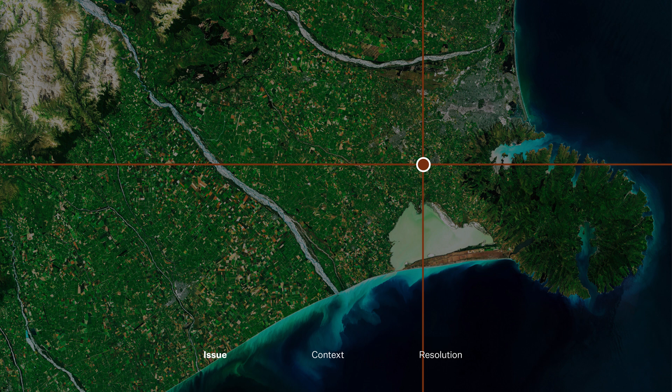We were interested in how this local project could unlock insights that might influence nationally or globally. The Canterbury Plains produce over half of New Zealand's grain and crop, and there are challenges with this level of productivity. Our intensive farming practices have turned Lake Te Waihora into one of the most polluted lakes in the country. And there is political context too.

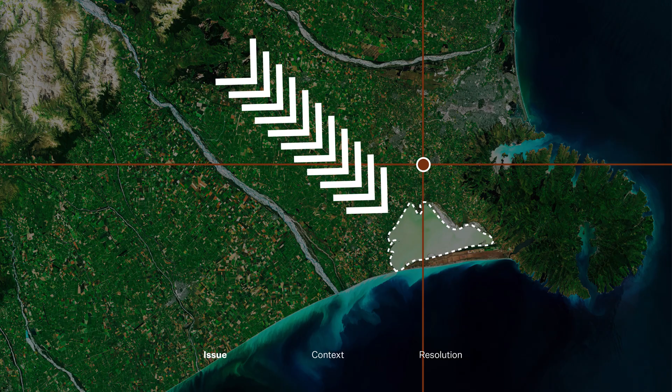Lincoln University responded to the students' climate protests by committing to decarbonise their campus and move away from coal. We have farmers who are exposed to methane taxes, and a lot of the science occurring in this facility is to help them with that.

This project site played an important role at the interface between Lincoln University and the external agri-sector, and we conceived of the project as a continuum from education to research to commercial science, extending the student learning experience into real-world scientific application and vice versa.

So how do you break down the barriers and accelerate research and innovation? Global food production problems will not be solved by traditional thinking. It is people that need to be at the heart of the solution, and Waimarie's goal was to create an environment to overcome these challenges through inter-organisational collaboration and a new approach to education.

Our project briefing reached well beyond the site and included intensive workshops with students, lead scientists, farmers, local mana whenua, and multiple land-based research institutes.

Te Taumutu Rūnanga narratives gave us a uniquely local approach to sustainable design strategies for the project. Lake Te Waihora was once an important food source for the Rūnanga, and the project siting is a direct expression of the project's commitment to sustainability.

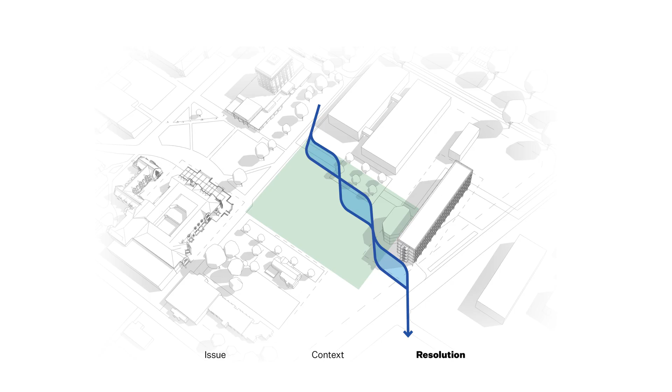Overland flow paths determined the location of attenuation basins to treat and filter stormwater for the campus. Landscape spaces continue the campus character. Labs and offices interact with the neighbouring research partners, while the teaching building defines the heart of the Lincoln University campus.

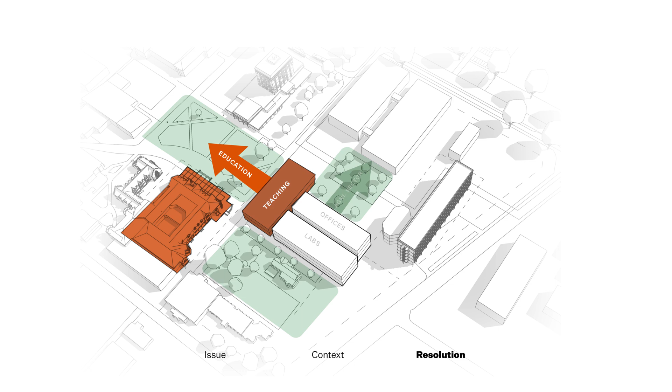Adjacent our project is the Category 1 listed Ivey Hall Library, a Jacobean-era building whose scale, vertical rhythm and curved gables gave inspiration to a robust two-storey brick building that houses teaching and learning spaces. The red brick and limestone facade are a contemporary take on its Jacobean neighbour.

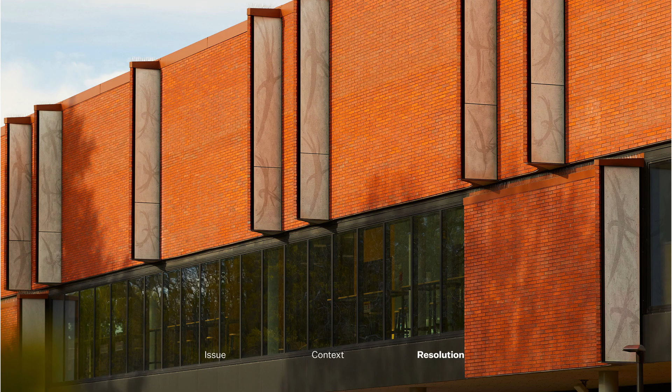This is a paekaka, a symbol of pre-colonial agriculture and innovation. It's been found scribed into Canterbury limestone bluffs and seen carrying people and kumara on its back. Overlaying European and Māori agricultural histories, our red brick facade is peeled back to reveal a limestone interior with etchings of paekaka, delivered through the co-design process with Ngāi Tahu artist Piri Kāhui.

Adjacent, a highly technical three-storey shed, with cost and material efficiency in mind.

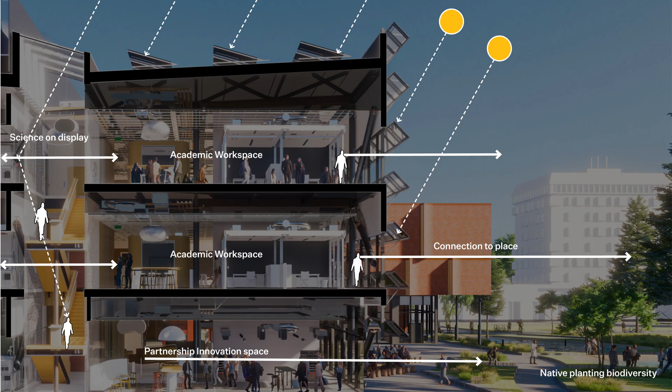Without the budget for solar control, an extensive co-design process together with Meridian and the facade engineers determined the perfect balance between solar shading, seismic slip detailing, outlook and energy generation. The resulting workspaces are calm, with high levels of natural daylight and beautiful views through the panels and out to the agricultural landscape beyond.

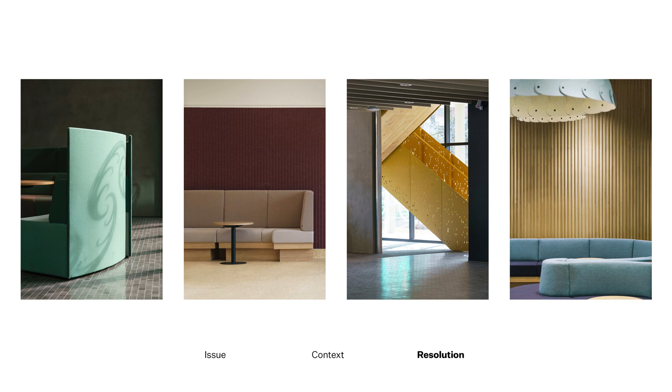Fabric and colour selections create a warm and vibrant palette inspired by a well-loved copy of the standard soil colour charts, borrowed from a local professor who identified the Lincoln-specific soil colours. The Lincoln campus was sited where it was because of this unique intersection of hill, plain and wetland soil types, further reinforcing the project's connection to the land.

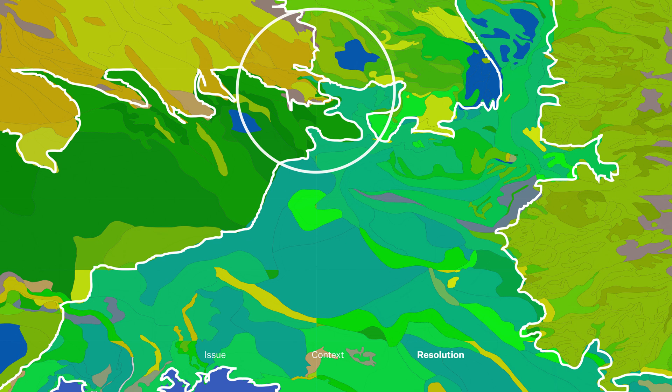When Bernadette asked to talk about the state of practice, Milton Friedman's pencil came to mind. He said there's not a single person in the world who could make this pencil. The wood comes from trees cut down in Washington. To cut down the tree, it took a saw. To make the saw, it took steel. To make the steel, it took iron ore. Compressed graphite made in South America. The eraser comes from Malaya. They talked about the brass ferrule, the yellow paint, the glue that holds it together. Literally thousands of people cooperated to make this pencil.

More than ever, I believe at the macro scale, it is about distilling and communicating often complex ideas and creating a collaborative environment where everyone can cooperate and bring their very best to the project. This idea of complementary partnership, of understanding the strengths of others around you, is one of the founding principles of our firm, and it remains one of the most valid today.

Waimaria's procurement process was innovative. The contract was let after a developed design package, and then the team came together under Leighs Construction. So consultants and subcontractors were preparing shop drawings together, creating a fully integrated design approach that eliminated duplicated effort and really made the most of combined contractor and consultant expertise. Leighs saw value in engaging the consultant team well beyond, with industry-leading BIM tolerances, which significantly reduced RFIs, contributing to project delivery that is on time and under budget.

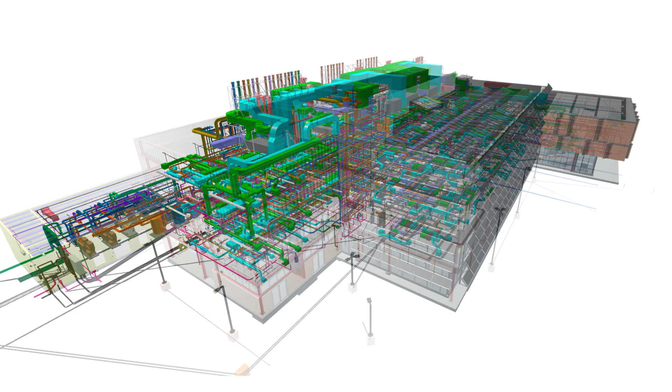Thanks, guys. I'm getting the one minute waved around at me.

So, how do you achieve a continuum that bridges education and research? Well, the exterior is specifically articulating the relationship between research lab and learning spaces. The interior is deliberately continuous.

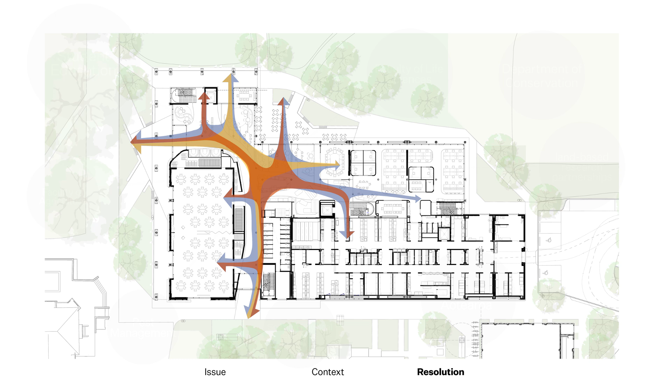We extracted the social amenity, partnership and meeting and eating spaces from each siloed department and collated them on an internal promenade with a shared cafe, encouraging students from different research groups to meet and connect with themselves, with campus visitors and employees from the co-located agri-sector.

The spaces are honed to suit group study, extending learning opportunities outside the classroom and improving educational outcomes. These are vibrant human-scale spaces designed alongside students to give them the environment they love.

Upstairs, students are welcomed into the heart of the campus to meet with their academic mentors and feel immersed in the real-world scientific research. Laboratories break with tradition, transforming hidden rooms into glass-walled spaces with science on display, creating a didactic design that educates users.

Given the science is targeted at increasing the yield of the local agricultural sector, it was important that the building equally played its part. Oak trees felled from the site were reused in the interior. Mass timber stairs and finishes and a timber strategy throughout further reduced the embodied carbon. There's 10 tonnes of locally grown wool in the project insulation and 100% New Zealand wool carpet. It's deliberately reductive and all systems are expressed in their own right.

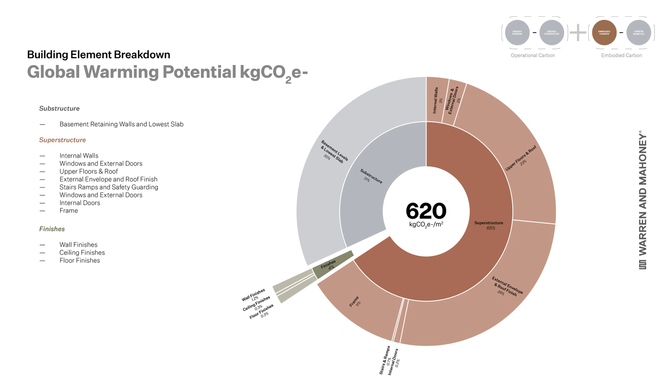Okay, I'm going to move on a bit here. The low carbon brick was quarried just down the road in Selwyn and textured to express Ngāi Tahu values. We can measure each part of the project as we're designing to identify the outliers, like the example here in green, to make sure our internal finishes and dematerialisation approach were delivering on their promises.

All of these moves represent a commitment to change, leading to a carbon assessment that surpassed RIBA's 2025 goals by over a third, proof that low carbon design can be achieved on a tight budget.

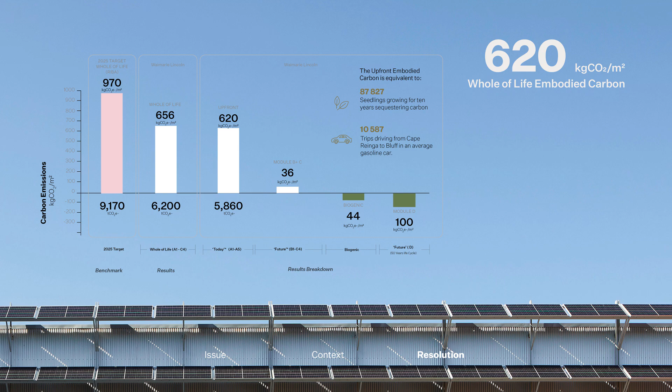At the macro scale, our practice in Ōtautahi is a blend of timeless principles with new and increasingly scientific approaches to measuring our designs, delivering projects on time and within cost and carbon budgets.

Waimaria recently won the award for the best learning environment in the Indo-Pacific region through the INDE.Awards. So through the local lens, our regional work can be influential on the global stage. Thank you.